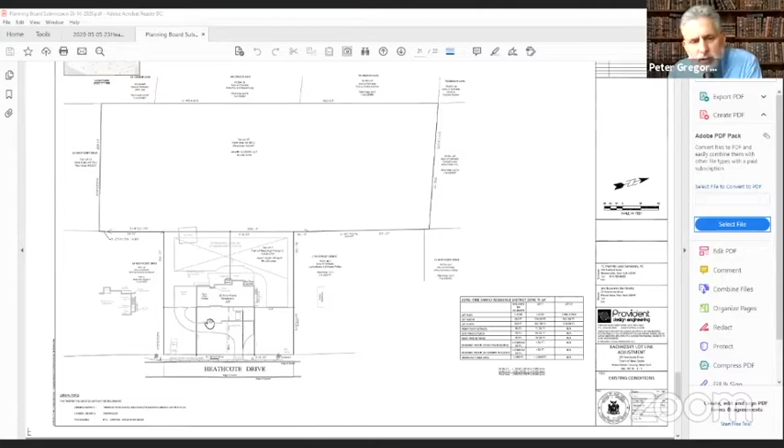As was previously mentioned, you can see how this property is constrained, with the septic system located to the rear of the property, the house and driveway, but the front of the property is encumbered with the stormwater mitigation that was required at the time the house was constructed.

This is the existing condition we are looking at right now, and this would be our proposed lot configuration, or amended lot, once the two properties are merged, indicating what our new zoning setbacks would be for front, side, and rear. You can see where the extent of the septic system would run and the area that would become available should anything be designed or desired to be constructed in that location. So what we're looking to do is move forward with this lot line adjustment and have those two properties merged to consider for future use on that portion of the property.

Okay. Sabrina's not here right now, but Bob, could you run through your comments, and then we'll ask Dennis to run through his comments?

Good evening, everyone. Basically, the way I set up my memo was I had certain notes and added clarification that should be added to the existing conditions plan, EC1, EC2, EC3, which pretty much consists of tax lot data, wetlands or regulated wetlands buffer should be shown, and also the existing water main on the existing plan. Then I switch over to the preliminary plat comments, which are just things that should be shown there, not super important, but nonetheless, such as the section, block, and lot. Again, it should always show the associated wetlands and buffer.

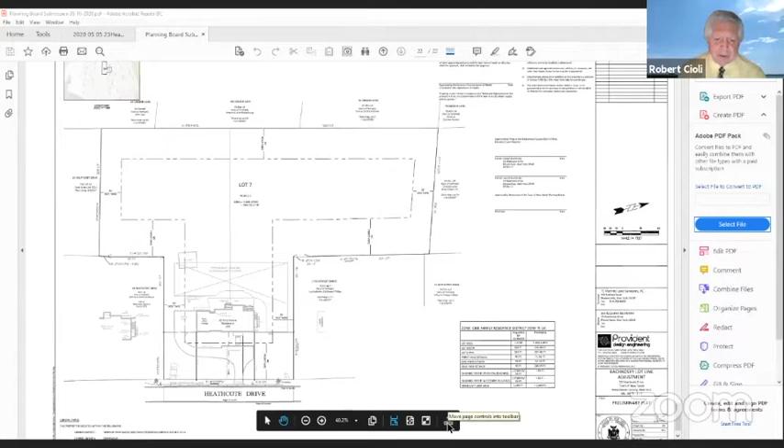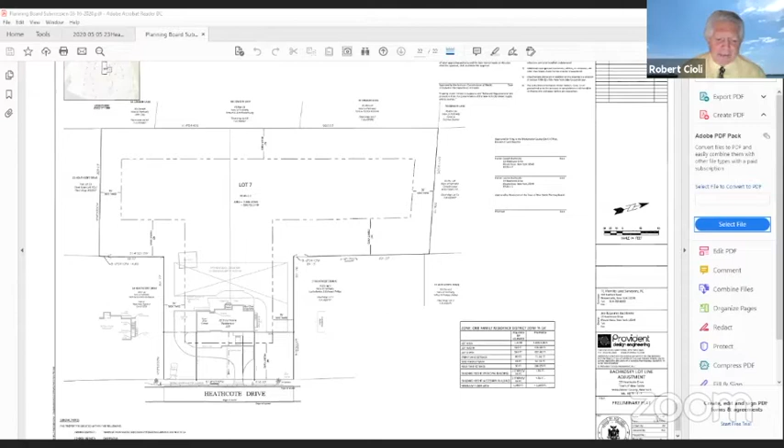Westchester County buffer jurisdiction is P3. P4 is basically, you should show the existing line between the two lots before it was joined as one. The labeling system should be Lot A, not to create any confusion with the parcel numbers. That's P5. P6 is the title of the re-subdivision that I recommend be on the subdivision map. P7 is designations and referencing that should be made in the title to other filed maps around the perimeter. P8 is items that should be shown on the plat, required by the Westchester County Clerk's Office, and that should be all signed and sealed by a New York State professional land surveyor, where I outline items A through I. That is all I have in this memo for this application.

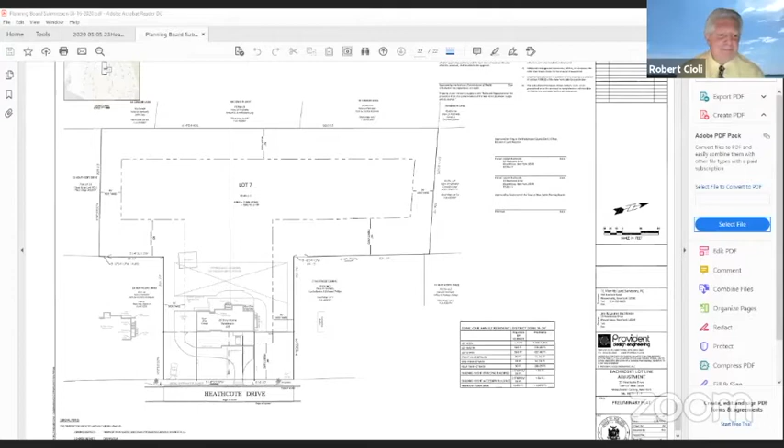Okay, Dennis, would you like to run through your comments?

Sure. I guess first off, I have to start by saying I have two memorandums. That evolved because when this application was initially supposed to appear for April 7th, that memorandum, which I generated March 31st, was really the results of a site reconnaissance and looking at Lot 7, having no other information with respect to environmental, I'll say, site conditions. Then on the 7th, Mr. Gregory was able to email me a PDF copy of the wetland delineation report done in September of 2016, and around the same time, said application moved to tonight's agenda. So the second memo now is the culmination of site reconnaissance, review of this memorandum, and review of the federal manual on how to identify and delineate wetlands. So that's the memo I'm going to be commenting from, if that's clear.

Dennis, is that the May 1st memo? Yes. Okay.

I find this to be a difficult site, obviously, and difficult in terms of wetland identification, because in reviewing Mr. Janning's report, and then Steve Coleman's memo which summarized that report, there's obviously not the level of hydrology that was present at that time that I was able to witness.

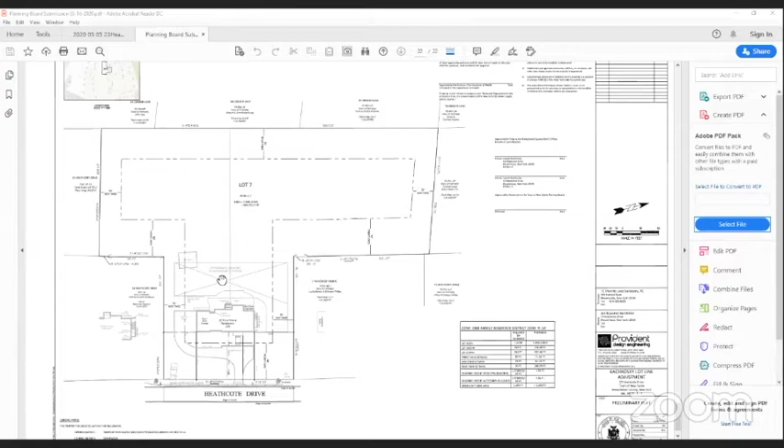Sometimes it's not easy to be able to, the majority of the year, walk out to a site and say, yep, it's wetlands. So that's why I recommended that, since this is the time of year where you have your best indicators of hydrology, a spring delineation to compare it to this fall delineation would be most prudent.

But that's not to say that the applicant is not applying for any activity in this area. So I guess this would just be for marking the maps, and for perpetuity, so we understand what's there. But again, to be clear, the applicant's not proposing any activity, so it seems to me they're not going to need to get a wetland application, right?

Correct. I just want to make sure—on the last page of my memo, they're not identifying wetlands on the lot, so I'm not comfortable with that conclusion at this stage. Right, I understand.

Any questions, comments from the applicant or board members on Dennis's observations and memo? Yeah, I do. I do too. Tom, you go first. Okay, thanks, Greg.

I actually think that with respect to Dennis's concerns about the wetland, which may or may not be there—we're yet to determine that—but if you go on the town GIS mapping system, you will be able to see the entire neighborhood.

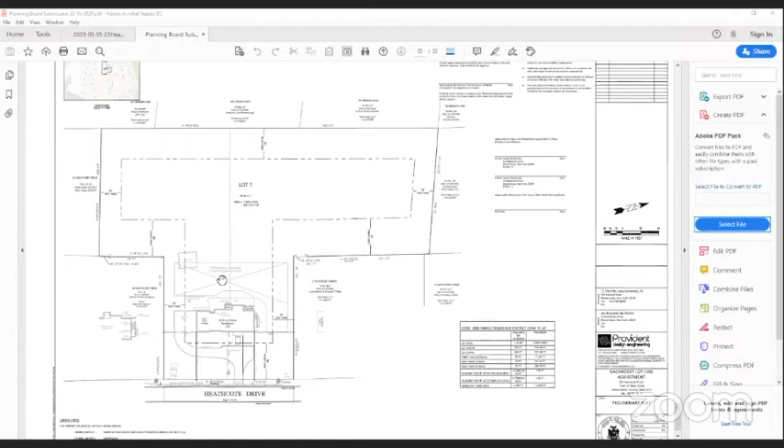What's interesting about the neighborhood is that it really sits on a plateau, which has on one side the ravine that the valley the Saw Mill River runs in, and on the other side the golf course. Both of these are in low areas, and there's a plateau that not only Heathcote sits on, but also Cowden Lane, and I think the other one is Petersville Road. Do I have that right? Correct. So there are three fingers of development that go from the road north.

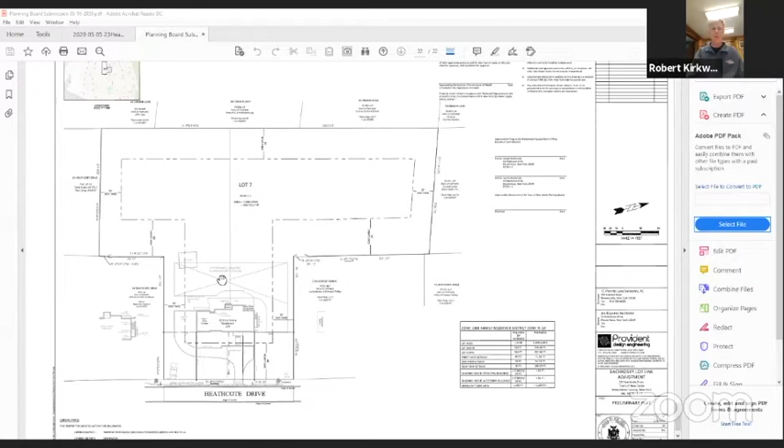It's interesting to me that for some reason there's sort of an anomaly here. There you go, excellent, thank you. There's sort of an anomaly here.

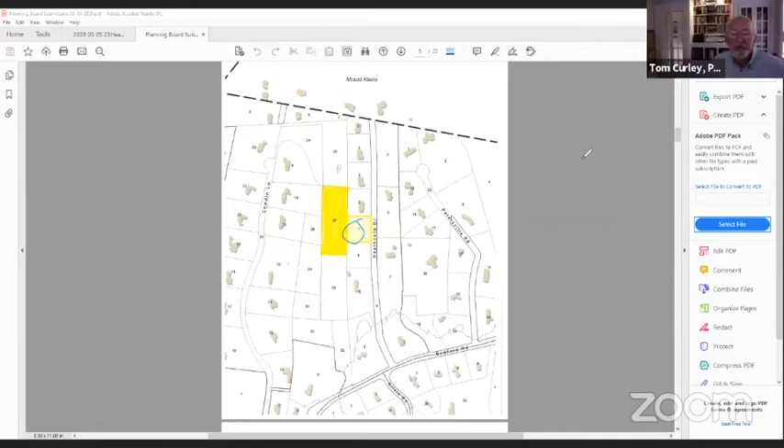Can I get my cursor on the screen? I believe you can, how do I do that? In the top, Tom, you have to turn on your annotation toolbar—the green bar at the top says view options next to it. Click the drop down and select annotate, then you can click on mouse or an arrow, whatever you want. Thank you, okay. I did that—hey, get off my drawing. So can everybody see my cursor?

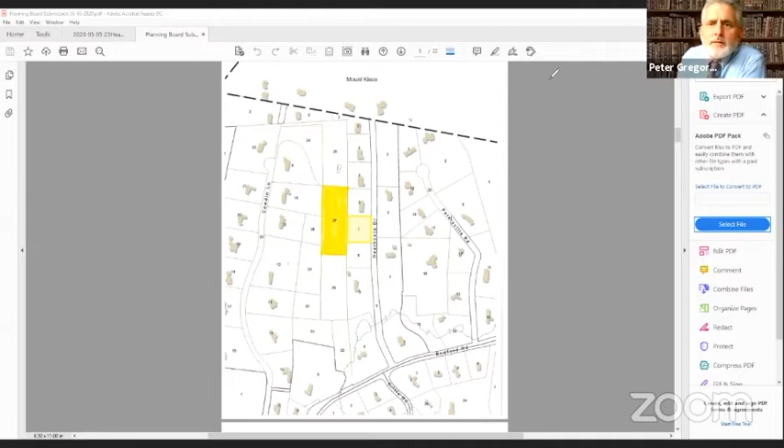Yes, is that you? No, that's me, this is me. Well, where? You may have to draw something, Tom. Okay, I'll draw something. So let's see, along... there it is. Here we go.

There it is, right in here, you can see it right in here. There's a sort of anomaly right in here.

Which is a sort of leftover area between two normal zoning roads with standard zoning lots on them. And for some reason this center spine—Dennis, I wonder when you use the word spine, were you referring to this? Because these are separate tax lots that look like they are attached in ownership to the abutting lots on Heathcote and Cowdin. That's certainly the case with the Singh lot, which we're going to see soon, and the lot we're talking about now. It's interesting to me that these just somehow got left over. Maybe it's just because of the geometry of how the streets and subdivision got laid out, and so these just ended up being leftover parcels.

I don't know what the history is, but the effect is that if you look at a Google Earth view of this area that I've outlined, it's just complete green.

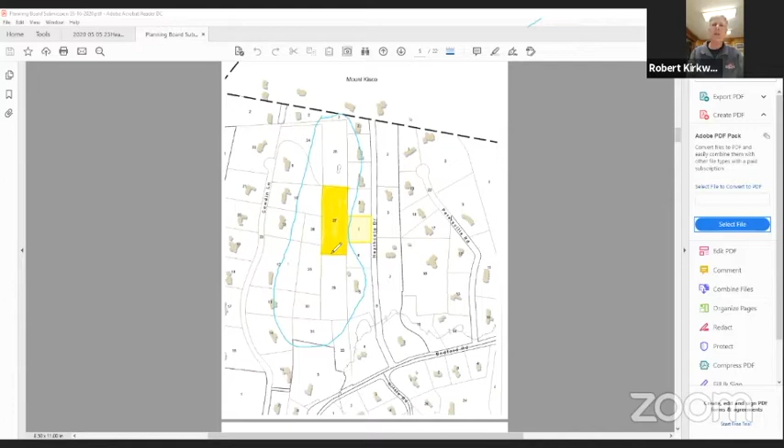Which environmental zone are we in here, Dennis? Is this the environmental district with the 150 or the 100 setback? A hundred. Okay, thank you.

And the other issue, Dennis, when you were out there and observed some of these issues and conditions, could you figure any sort of function that might be provided? Was there any kind of water flood containment? Did this flow down through lot 25 and then exit eventually to the sawmill? I'm just trying to get some sort of feel. I'm familiar with some of these areas, unfortunately, been around too long, because the Petersville area was a tough situation for the town many years ago.

In addition to citing something like this, one of the issues is that we look at the function. And I want to throw out to the applicant that, if a wetland is determined to be there, we still have wetland permits, and depending upon the value, function, and what it's actually doing here, you can always apply for a permit for whatever activity you might want to pursue on this property. But again, that will be determined in terms of the size of the wetland, and our buffers work 100 feet from the wetland itself.

Okay, so this is Eldad. I understand the concern in general to have a true understanding of what's happening in this back lot, but I don't want to lose sight of the fact that the applicant is merely asking for elimination of a lot line, and I guess Joe, as well, condolences to you and your wife's family.

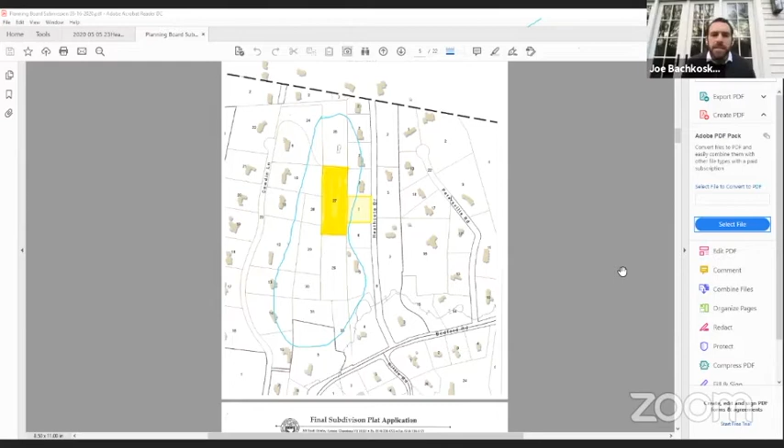Dick, I was out there prior to our last meeting when this was supposed to appear first, and drove around a bit. To the north, if you take Heathcote north - it's not on our map, I forget what the connecting road is back there - it's Stockton, thank you. Make a left on Stockton and then look back into this wooded area.

You could see that water is daylighting. I don't know whether it's out of a culvert or a spring, but there's water daylighting in the woods and then crossing underneath the road. I don't know whether that's an intermittent spring, or I have no idea what it is. It may be leftover structure from an agricultural drainage system. I have no idea, but if you look at the topography of the area, which isn't on the map we're looking at now, you can add the layer and look at it.

You can see that Cowdin Lane is on a ridge line. It's not a steep ridge line, but it's the high point, and then the topography falls off towards Heathcote. Along the line of parcels 29, 28, 30, that's where it falls most steeply, and then when it gets to parcels 26, 27, 25, it flattens out. So it might be that this is where the wetland is collecting, at the bottom of that slope, where the water collects, or maybe it's just sheet flow after rainfall. I have no idea, but that's the nature of the topography, and there's this daylighting of water happening to the north of here.

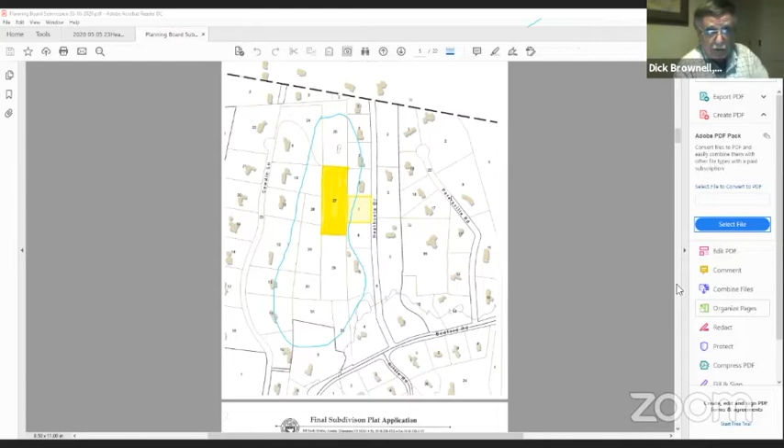And this would apply to development of the area, or construction or anything else on both lots, because right now one of the numbers is being exceeded, so you can't add a pool, or a tennis court's huge, but let's say a sports area, as I think the applicant mentioned. I think it has to apply to both parcels, or the entire parcel once it's joined. Agreed, once it's joined, the entire parcel.

Right, it'll take care of those issues, all wrapped into the resolution of approval. Okay, Clinton, are you okay with that approach? Yeah, I think it makes good sense.

So you would need to set a public hearing. Pardon? What was that, I didn't hear it. Set a public hearing? Oh, we do have to set a public hearing for this. Okay, yes you do. Can we waive jurisdiction on this, Sabrina? Is there something here that is preventing us from waiving jurisdiction and waiving a public hearing?

We don't have any environmental permits issue, I think you can. I think you can. The only issue is that typically with a lot line change, if we would have noticed this at the first meeting, it looked like we were going to do the public hearing or waive jurisdiction. I defer to Clinton on that. I was afraid you were going to say that, and I haven't looked at it. Sorry, I believe you can, by my recollection.

I'm afraid I would just be... I believe you can proceed to final without doing anything, but I don't know about a hearing. I would suggest you go ahead and move and set a public hearing for whenever your next meeting, or the next meeting that can fit with notice. I'll look it up. If it's not necessary, you don't need to give the notice, Sabrina, and the planning board can just discontinue the hearing. If it is required, it'll be on and you can have the hearing.

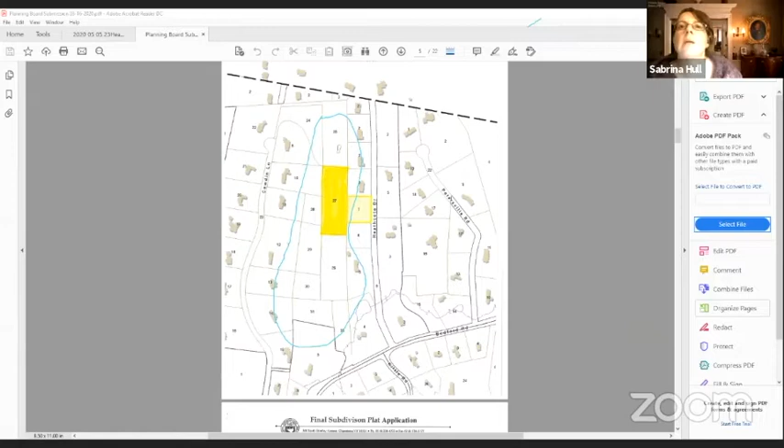Understanding the applicant's desire to move forward and the board's willingness to take it step by step, if the board agrees and the Chairman feels it appropriate, staff can draft a resolution for the same meeting where you would set the public hearing. So in essence, you could combine two actions in one, provided it's the board's preference. I'm with that, I think that would be a great one-step approach. I agree. So then I would offer that the June 2nd meeting would be prime for the public hearing and a draft resolution to be provided to, or discussed by, the board.

Terrific. Do we need a motion for the drafting of the resolution? Motion to direct staff to draw up a draft resolution for the meeting of June 2nd on this application. Motion, second, all in favor? Aye. Any opposed? Okay, if not, we'll see the applicant on June 2nd for a public hearing.

Okay, so I just want to get to the site plan because this is the subject of what we want to talk to the board about. So I think what we'd like to do is briefly go through the town planner's memo, briefly go through the town engineer's memo, and then end up at Mr. Corelli's memo. Of course, Mr. Corelli did comment that it was premature for him to fully comment on the application because of the foregoing that we still have to figure out what's going on the adjacent lot that the board just finished discussing.

So we've gone through Sabrina's comments, and we really have no problems with the points the town planner is making. One of the things we tried to do since we last talked to the board was, when Campbell Engineering first designed this septic area, they had the primary over here, so we worked with Michael and said, why can't we switch this and put the primary up front? What we're going to try to do is put the primary up front and not have to build this, and we have that as we get down to the alternative septic plan.

So this is the plan that was before the board originally, and for whatever reason, Campbell Engineering had the primary back here. If the Westchester County Health Department would be amenable to it, Dr. Sing is amenable to it, and what we could do is not clear this whole area back here. So this is the alternative plan, and Dr. Sing is willing to pursue that. That would just limit the amount of disturbance we would have to do in that area. So that's something we have no problem doing, and we're certainly willing to go through that.

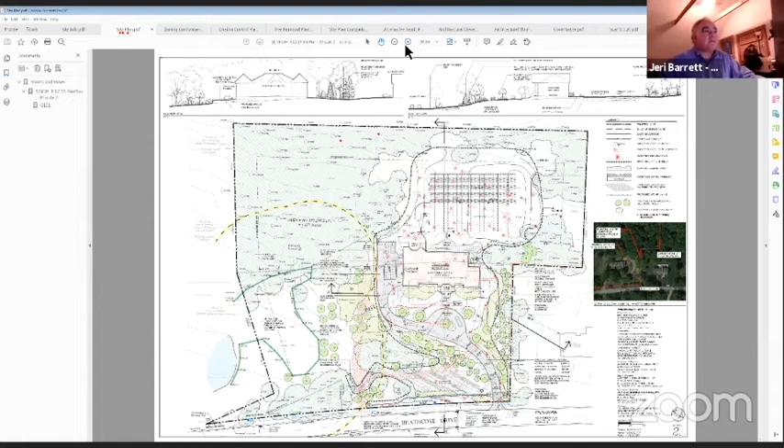Well, here's what we're proposing to do. Let me see if I can blow that up a little bit. Does this work? So this will be our grading and clearing limit line, which we know we have to get on the plan. We've got an 18-inch tree, a 12-inch tree, a 48-inch oak, a 10-inch maple, another 10-inch maple, and a 30-inch oak. We're going to keep all of that there.

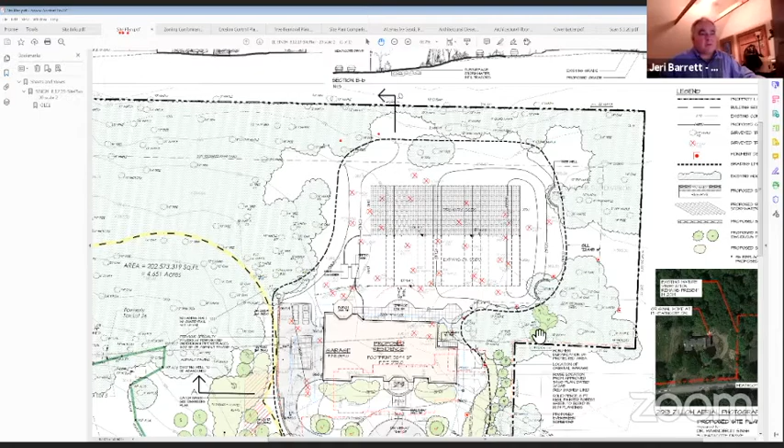Where we do have some gaps, we could plant some evergreen trees—that's what we're proposing. So we're proposing to keep a natural buffer here between the two neighbors.

What about this area here along this line? Can you see that? I just drew it with green there a little bit. The eastern line—I think it's the eastern line. I didn't see that. Oh, this right here? Yeah, along here. Well, this is probably about 100 feet. This is our grading limit line. We're going to leave it natural. We're not even going in there. I mean, if it does open up, it's not fully—

It's a wooded area. There are places where there are trees, and some areas where it's not bare ground—it's underbrush and that kind of thing. But we were just going to leave that natural there. Again, this is the adjacent lot, and this is the extent of his yard here. So this area is pretty much natural anyway.

Yeah, just as an observation for board members, I would strongly urge us to consider very tight and rigid clearing and grading limit lines on these lots. These things are behaving as flag lots—they incur into other people's property and loom over it. So whatever we see from these applicants, and perhaps even on the prior applicant, we really need to carefully look at these clearing and grading limit lines.

I don't understand why this is a flag lot, Bob. It's not a flag lot, but it behaves as such to the extent that you have this entire piece sitting right behind someone's house and yard. Well, it is not a flag lot. It is not, I'm just saying it performs to a certain extent, less than the last one, but it still has that feeling.

But if you look at lot 26 and head towards Cowden, there's another open space there that is a separate lot. So it isn't - the intrusion is relative, particularly with the septic fields being there. You're going to take down some trees, but some will have to be planted.

I guess I have to do a site visit for this. I think it's going to be important for us to lay this out for applicants now so that they understand, and we have demarcations recorded so that people are on notice that some of these areas are just not suitable for development because of the impact to neighbors.

Just so my observation - if Bob, if I understand you, we all agree it's not a flag lot, and it could behave as one if the portion of the lot that wraps around the back of somebody else's property is cleared and put to some use.

And that particular condition on the previous application was highlighted by a neighbor who said they didn't want clearing on the lot behind their house, which is essentially what you're speaking of. Is that right, Bob? Exactly right. But that house, that person that said something, they live on Cowden, right? No, next door, same street, Heathcote. Oh, Heathcote. So it is, okay, so the wraparound's a serious issue.

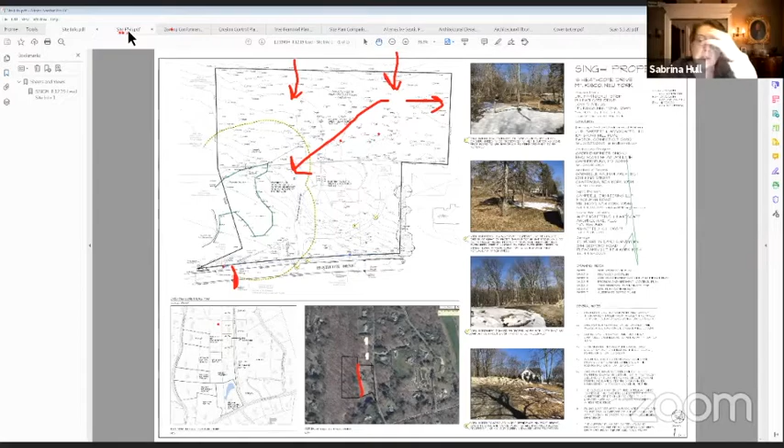So Jeri, were you finished with Sabrina's memo, reviewing any points? I think we're done with that, and I'd ask Alan to talk a little bit about Bob's memo, if that's okay. Well, before we do, Sabrina, do you have any other comments on your memo and Jeri's comments? No, I think Jeri highlighted all my comments adequately. The question is whether the board agrees with his responses to my comments.

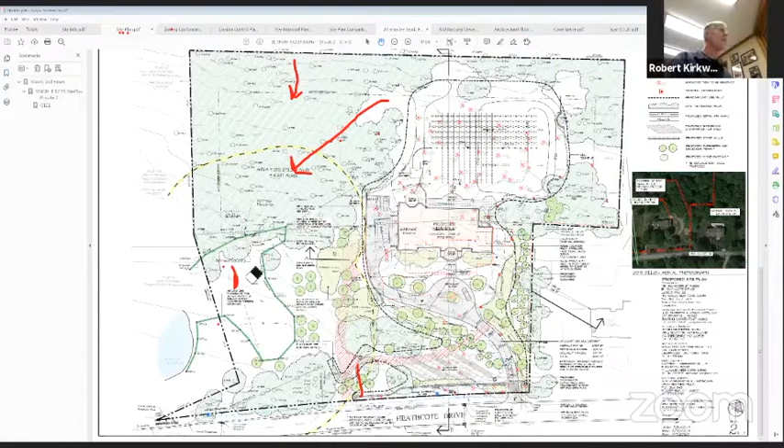Well, specifically, I think he's trying to find some more pervious surface, reduce the impervious surfaces and reduce the home. We have to talk about the setback, as you pointed out, and Jeri's talked about it.

So I guess we'll leave that. I will say they provided the alternative plan, and I'm definitely in support of the alternative plan for the septic. Yes, very good. Thank you, Jeri.

Have borings been made in both the primary and secondary septic areas to make sure the soils are good enough? Yes, they have. Okay, excellent, thank you.

Jeri, was there any reasoning that Michael had the fields flip-flopped? Your solution seems logical, I don't know why he went the other way. Was there a reason for that? Well, that was an interesting conversation because I had the same question. The answer was when the health department came out, apparently you have to have so many holes in a certain area to qualify. He had that many holes in the back, but not in the front, so he said, well, we've got the holes here, so we'll go with that.

But when it came up that the board was concerned about whether we have to build this whole thing or all that, I went back to Michael. He said we'll have to do some more holes. So I told him to go ahead and do some more holes and have them back out there. And they did—they had them back out there and dug a couple more holes. Great, so now they have the required number of holes in both areas.

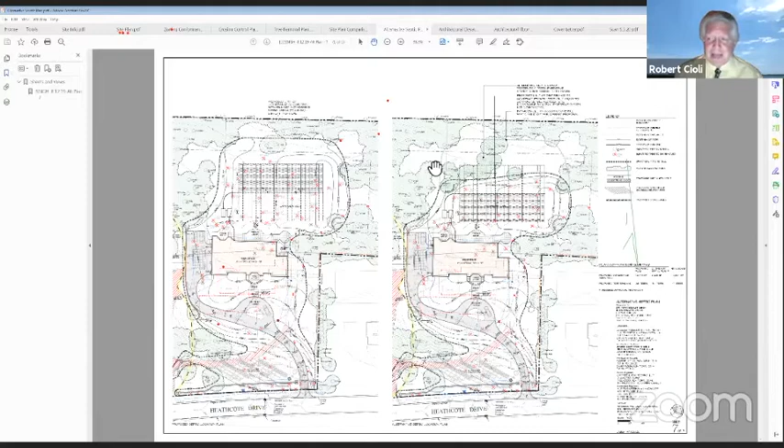Okay, thank you, Bob. Dennis, do you want to give us your thoughts?

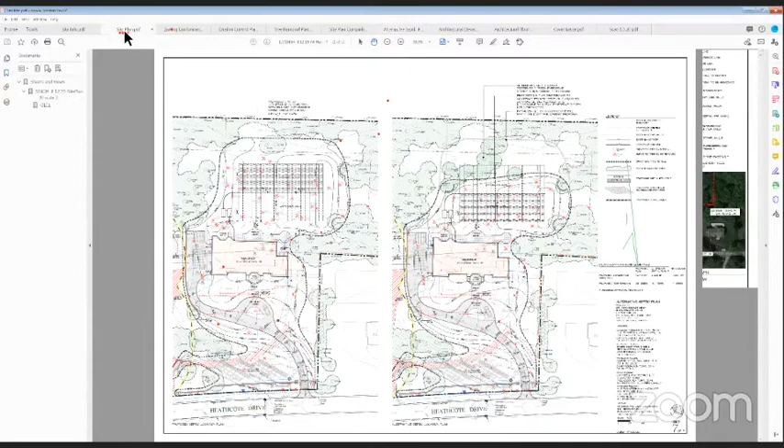Well, a little bit similar, huh? Obviously, when I was walking lot 27, some of what I was observing there spilled over into lot 26. At the time I wasn't thinking much of it, until I received the Tavolacci site wetland investigation completed by Mr. Janig and saw that he had viewed the area as a single comprehensive investigation. So I was put in a position whereby I'm making these comments onto lot 27.

I noticed some of the carryover of similar features and observations onto lot 26. So I made the same recommendation, that it would be nice during the hydrology season to conduct a wetlands investigation to see if we come to the same conclusions that were done in the fall of 2016. Right.

Yeah, I think that given that the place where the septic fields are planned to be built is 2 feet higher than the rest of the terrain, and represents a north-south ridge as opposed to an east-west gully, I think that's good.

I think one factor, if we find a wetland on 23 Heathcote, then where does the buffer zone go? But we've often put septic fields in buffers where needed. So I think it's good to do, but I think we'll find a better set of circumstances here.

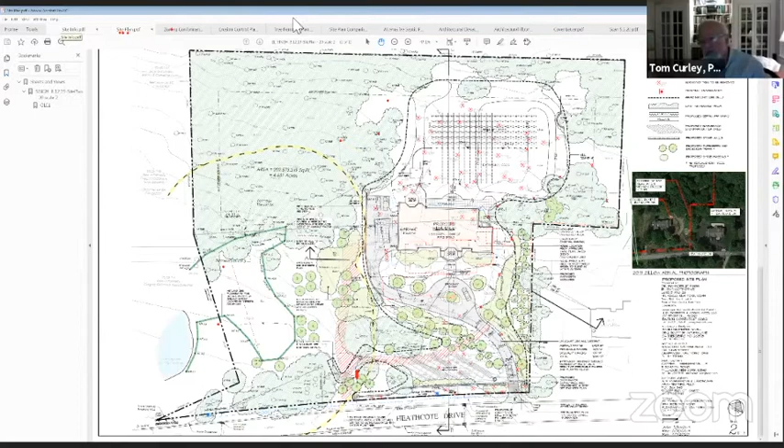It's also possible, Dick, you raised the question about whether we can just go ahead and screen the northeast side heavily to be sure privacy is secured. It's appropriate to hope that neighbor will appear in this process to get their input. I think it will also help the Singhs have privacy from the other neighbors with the issue, so it'll be good for both.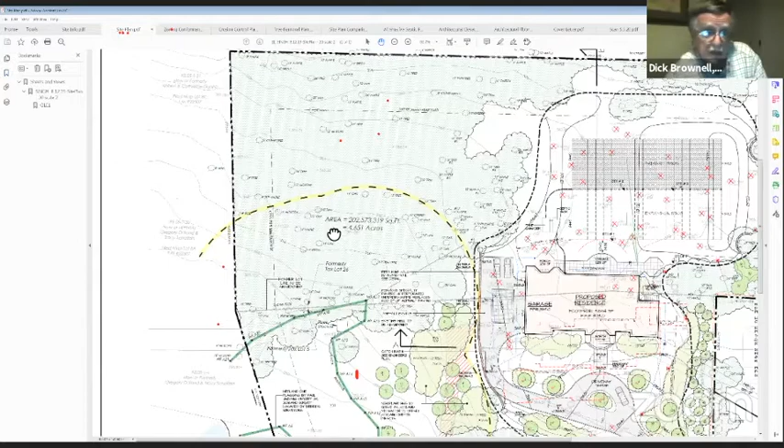Secondly, we need to have photographs. We need a site visit. We need photographs of what it's going to look like, if best we can, or what it looks like now, so we can see how many trees are being taken out for the septic field. That's why it's good to have some trees left, by building just part of the field to begin with, which will maintain the privacy of both neighbors much better.

Well, notwithstanding the engineering issue of a pump system, moving the house to the front will also probably reduce the amount of impact from building the septic fields, because that field could be built closer to the home, closer to the street, and even the expansion area, if we have to build it, there might be less impact. So it's interesting to look at what it could save for trees and other impacts up there.

Again, depending upon what Dennis finds with the wetland, if any wetland or buffer, that might direct us differently as well. So the applicant, until we really get the information on this wetland situation, I think we need to get that information before we get too much further down the road on this. That's an important threshold issue.

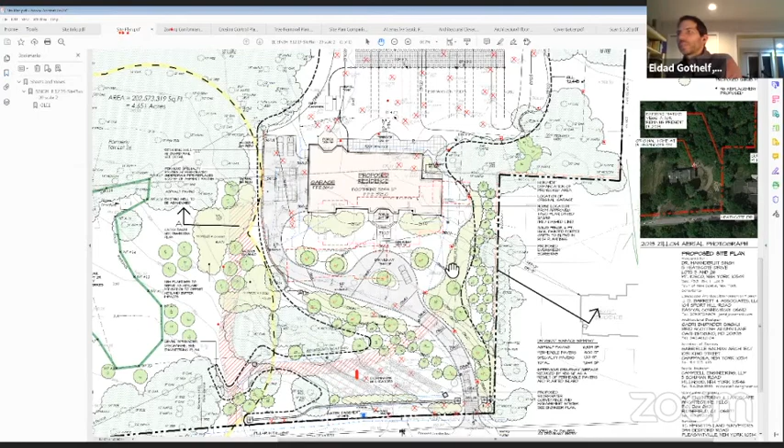Another threshold issue is this deed restriction question. The question was raised: is it even permitted to have a house built on what was originally the back lot? If it's not permitted, then that kind of answers that question. The house has to be pulled forward.

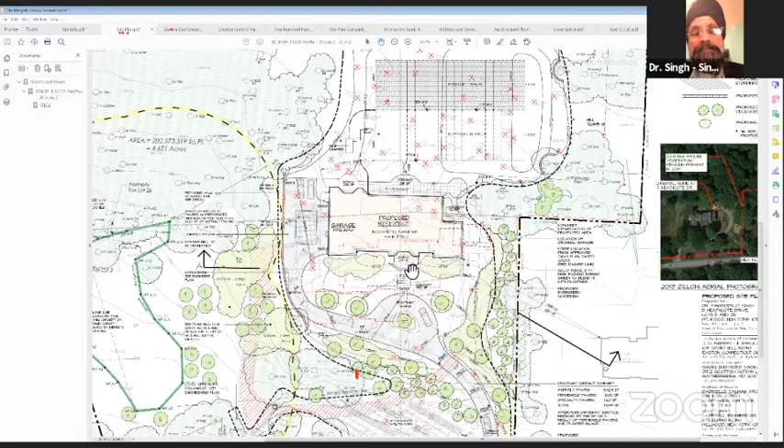But Tom, first of all, I'll say I certainly appreciate the dissertation on subdivision and setbacks and all that, but that's just me. The point is, I think the question is really the location of the house, and everything else is, to me, somewhat secondary.

You know, let me annotate here. There is the indication of the distance between the residence to the north up the street and the distance to the original house, the house as originally designed, and then the proposed residence as it is. It was closer, it looks like about 8 feet closer as originally designed, and now it's pushed back. So there is a trade-off there, right?

That distance versus angle. If it was pulled even closer to the street, it would be closer to the house, but the angle would be sharper. But it seems to me, and maybe I'll be saying this every meeting, there's a way to make everyone happy or everyone a little unhappy here, which is I think Dick's point of screening, but there are a couple of threshold questions here: the legality of the location of the house, existence and extent of the wetland, and then concerns.

I don't know how the board has dealt with this in the past, but some kind of understanding of impact on views from existing adjacent properties or existing adjacent homes would be helpful also in this case.

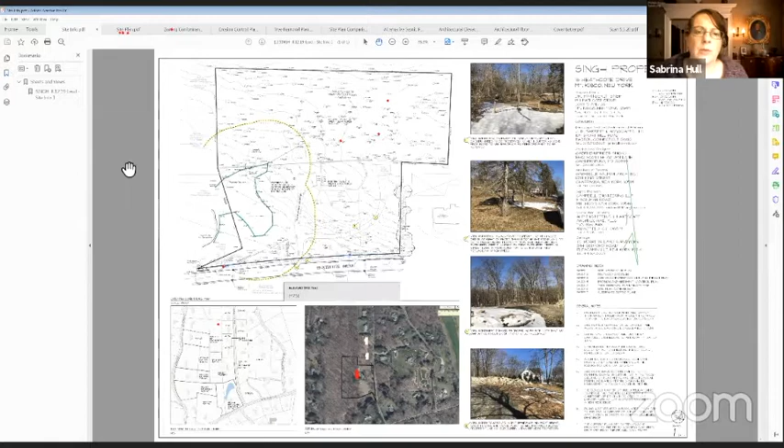If I may, for the board, the lot line change when the Tavolachi's house was here - Jerry, correct me if I'm wrong, but I believe it was further closer to the street, this red line right here. So that is still the same discussion over the placement of the house and its proximity to the road. This was where the Tavolachi house was, so it was mostly on the original lot. I think it was completely on the original lot.

So this is a big change, and I think there are ramifications to this lot line change that need to be looked at very carefully. Again, I would urge the applicant at this point, rather than spending a lot of time here, we need to get the wetland information. That is critically important. I think we need to get some information about this deed, the alleged deed restrictions, see if it's public or private, and perhaps investigate the history of it. I'm very concerned with the way these lots will perform by potentially incurring on these other lots that are on that front on Heathcote.

On the Tabalachi proposal, where was the septic field? Same place. Okay. So did we approve a lot line change with the Tabalachi application? Yes.

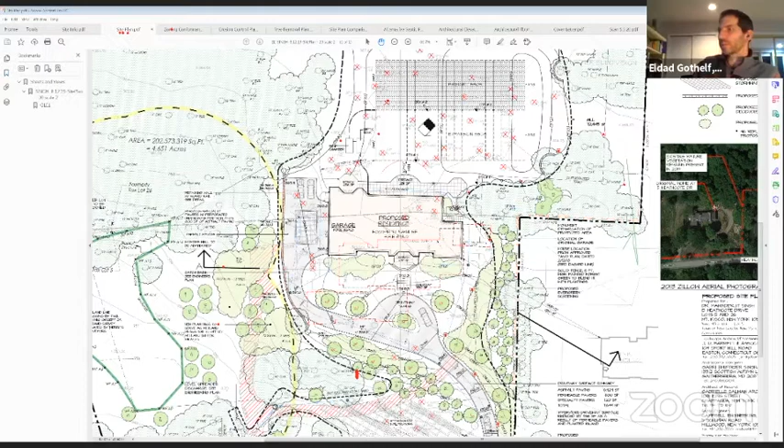Sensitive to concerns from the neighbor, especially given the pushing back of the house, but we also want to be reasonable here. The fence, I agree. The hedge being planted looks like an evergreen hedge. I haven't looked up the species, but I'm sure it's fine, knowing Jerry. But again, this is a two-story building, and there's a bedroom window on the second floor that looks into the side yard. So I would be looking for a little bit more robust, taller screening, which we've required before on other projects, and I'm sure that could be achieved here.

But the other thing I was going to say, if the Tabalachi application was not approved, but it was well on its way, and the location of the house on the Tabalachi application, if that's the red line, and the location of the septic field is where it is on the proposed plan now, there's not enough difference between those two things to warrant us saying we've got to make big changes here. Moving the house a little further forward, closer to the location we were close to approving back then, I don't think that's going to make a substantial difference in the overall development of the property.

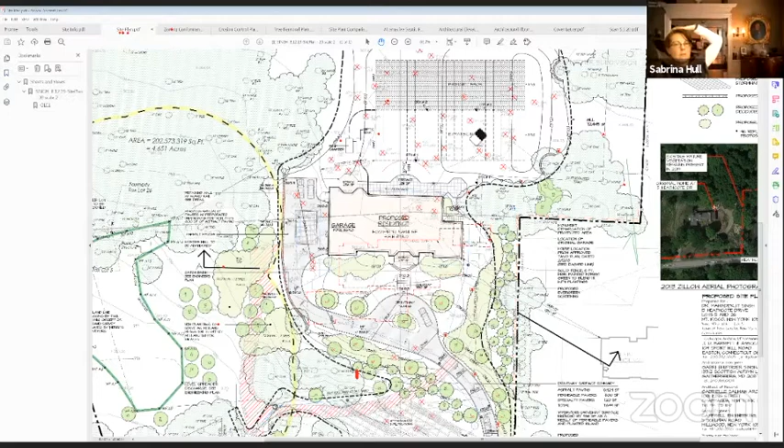So if I could just quickly chime in - good evening everybody. I did get called to this meeting late in the day, but I have been listening closely. We will get back to the board on all these topics, including the deed restriction. Clinton and I will get you that information, and we'll communicate about that and ultimately report back to the full board on that issue. So appreciate everybody's comments, just wanted to say hello. I've been listening, and we'll report back accordingly.

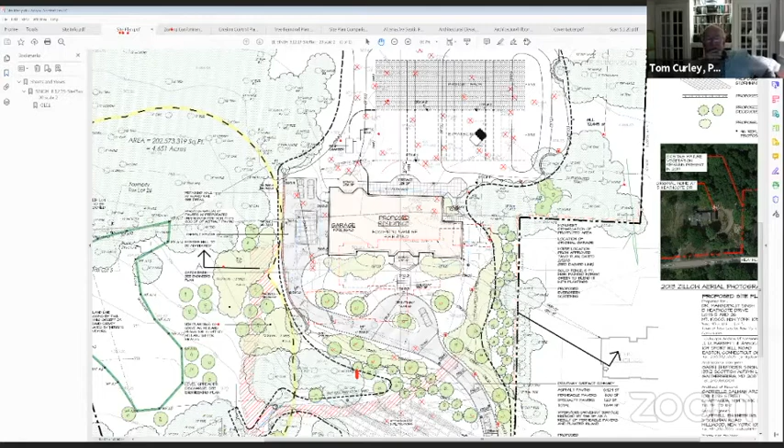It's a little bit difficult because obviously the applicant knows the history, and the applicant moved forward based on that history. It seems to me we're pretty close to what that history represents, and I'm not sure, unless something else occurs that we don't know about yet, it would be right to turn this thing upside down and start over.

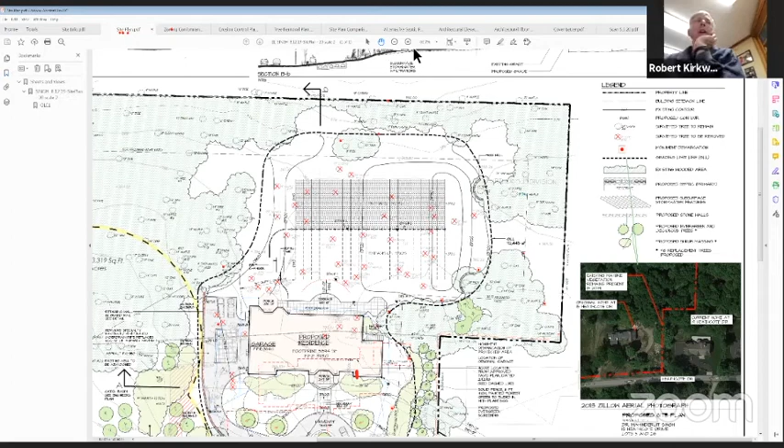I agree with that, but with the caveat that we don't have that information. So again, if the wetland determination is such that we discover we have a wetland or buffer issue, then we have to consider that as well. Right, of course.

So at this point, I guess what we should do is look to the applicant to provide us with some of this information, some of these answers, and look for a submission with this information. Maybe some of this is just going to be narrative without necessarily new plans, just to fill us in on it.

Maybe we can do it. Brad, I would say if the planning board is willing, and let's say you can do it - there's no way, I don't know, tomorrow, I don't know. How quickly do you guys think you can pull this information together? Jerry, you had mentioned you did some of this work for the zoning board, so maybe May 11th isn't too unrealistic.

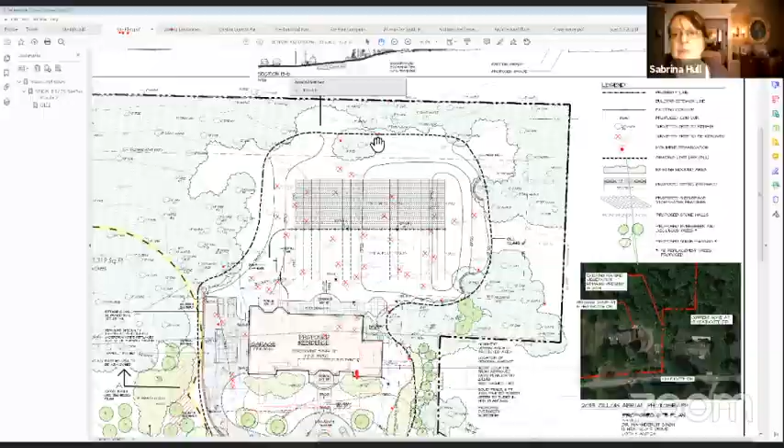This is a request for an extension of approval for the Chappaqua Central School District, a request for extension to submit the final subdivision plat, Button Hook Road, Sabina Road. Staff, any issues, questions, or problems with the request? Thank you, Clinton, thank you.

Bob, I'm leaving now, bye. Oh okay, Jennifer's back in. Take care, Clinton. Yep, Jen's here. See you, Clinton. Hi guys. Hi Jen. Hi, I'm back for the really exciting stuff. Yeah, exactly.

Take it away. Brad, you're still here. I'm sticking around. Yep, really is like a talk show. No, it's kind of like, what was the movie? I forget, well, not the movie, the game show where you have the different squares of people sitting there. Hollywood Squares. Hollywood Squares, yes. Yep, I'm dating myself. Yes.

Anyone have any issues with the extension for this school district? Nope. Nope. No. If not, is there a motion to grant the extension that's been requested? So moved. I guess it's retroactive, right?

We have to go back to March 6th to make this effective, right? And it goes to March 5, 2021. Again, I don't think it's terribly relevant. Is there a motion? So moved. Second? Second. All in favor? Or do we have to do a roll call on this too?